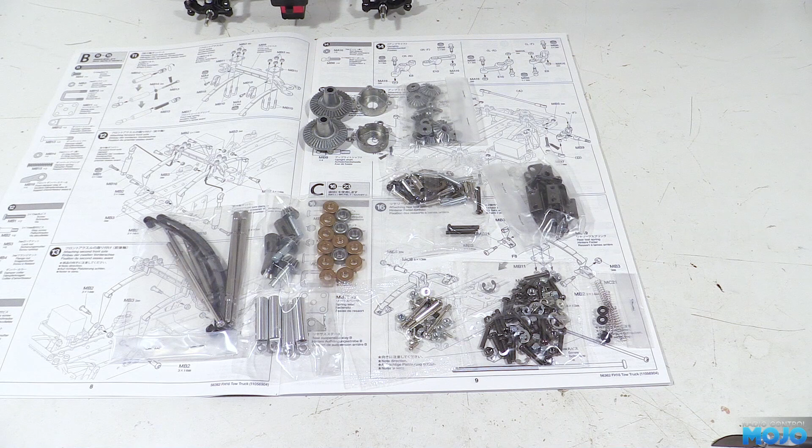Step 16, the rear leaf spring packs. We need 4 3x14 step screws, 2 round bushings, the silver ones that look like really tall top hats, 2 spring seats, 4 U-bolts, 4 stays, 5 M3 nylock nuts, 8 thin M3 nylock nuts, and the really long screw. For plastic we need 2 F2s and 2 F8s.

First then we need to make the 2 spring and mount assemblies. We use 2 of the U-bolts over F2, slotting them into the guides. Then pop the F2 over the centre rivet on the outside of the leaf pack. On the inside we use one of the F8s followed by a spring seat. To clamp it all up we use the 4 thin nylocks on the ends of the U-bolts.

Just like when we did the front suspension, we don't want to tighten them up all the way just yet. Do them up evenly, but so there's still a little bit of movement in the parts. On the ends of the springs we fit the stays with a step screw and a full height nylock, one on each end. When done it should look a little bit like this.

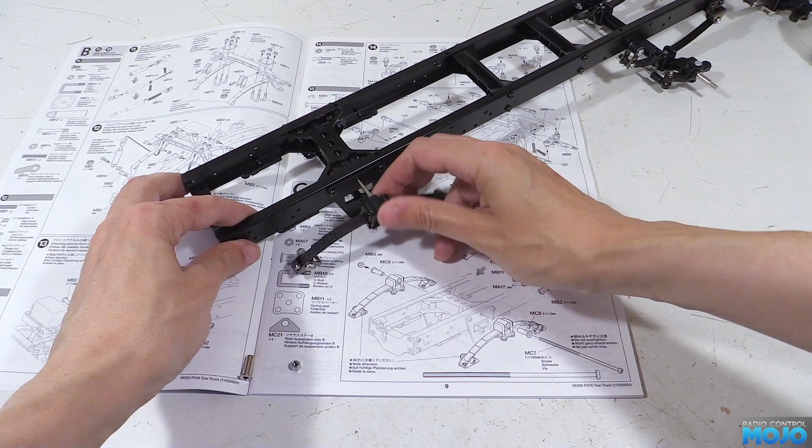Make a second one and we can fit them to the chassis. All we do is pop one of the bushings into the hole in F2 so the flange is on the outside, then pass the long screw through the bushing, through the rear of the chassis, through the cross member and out the other side. The other leaf spring assembly goes on the other side with its bushing, then we use the last nut to hold it all together.

When doing this one up, do keep in mind that it's a really long screw in there, so it might be a bit tricky to feel when it's fully done up. The screw will twist and even to an extent stretch. As long as it's tight enough to take out any free play, plus an extra 1/8 of a turn or so, it's going to be just fine. What you really don't want to do is just keep going and shear off the screw head. When done, the 2 spring assemblies should freely swing on their bushings with no catching or binding.

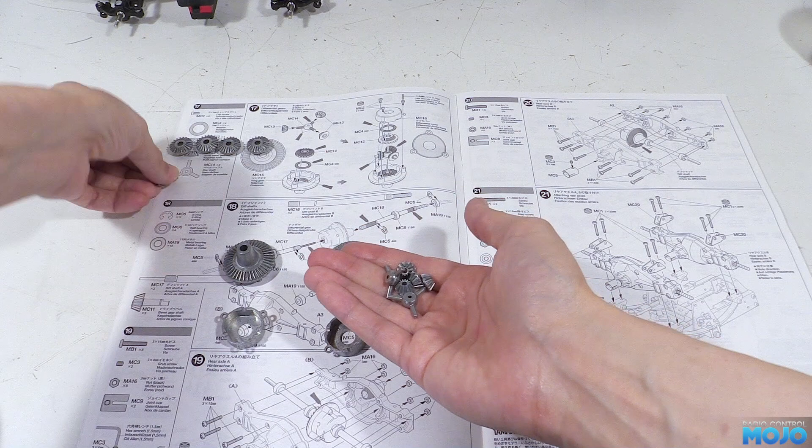Step 17, the differentials. For this one we need 2 of the diff case parts, 4 of the large internal gears, 6 of the small internal gears, 2 star shafts, 4 thin steel washers, and 6 M2x5 caphead screws.

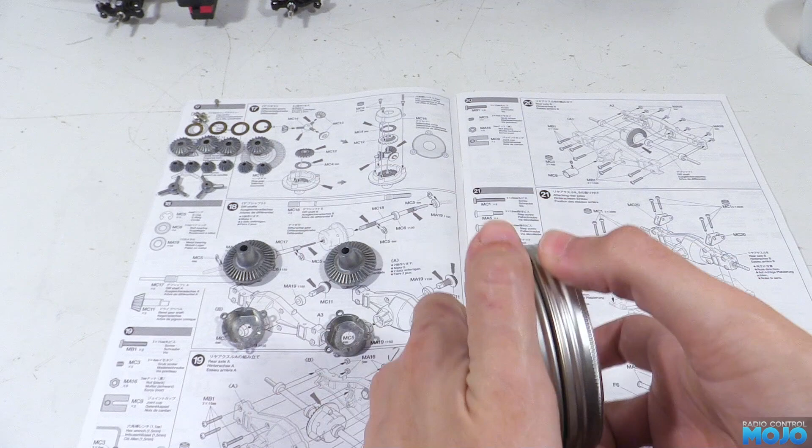Usually you'd build these up with the supplied ceramic grease, which is a very good lightweight lubricant. However, because it makes for some freely running diffs, you can find yourself in a situation where you're giving the truck some throttle, but it's not going anywhere. Usually one of the wheels is unloaded and just spinning freely. To help with this, I've been using some really thick and sticky blue lithium in my last few builds.

It still lets the diff do its thing, but it adds a little bit of stickiness, so you're a bit less likely to get stuck. Plus, if it mixes with Tamiya ceramic grease, it's not going to react, so we don't need to worry about leaks. The diffs are going to be well and truly buried in the axle when we're done.

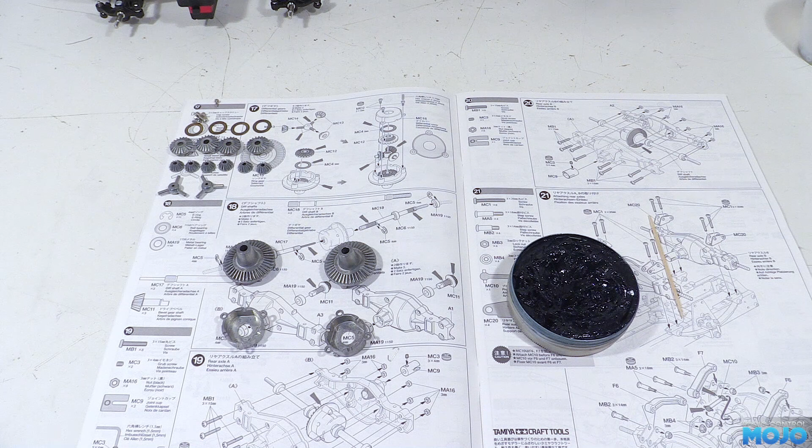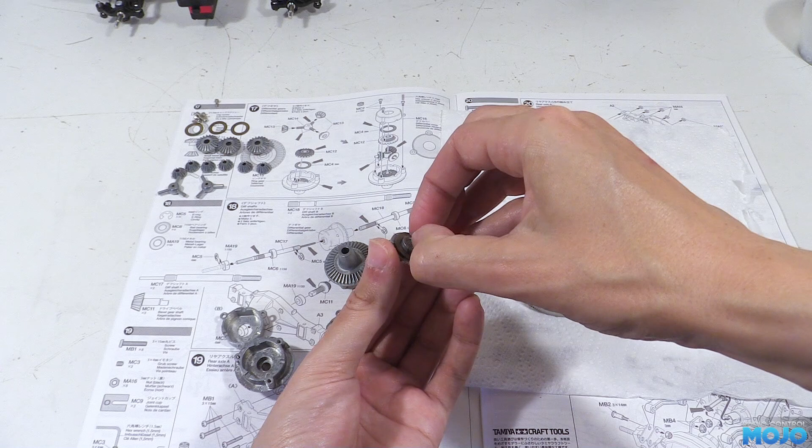If they ever need servicing, there's going to be quite a lot to take apart, so we need to get them right first time. We start off with one of the large bevel gears and add some grease to its back side. Pop one of the large washers on and apply some more grease to the washer. The gear then drops into the deeper half of the housing.

Next to the small gears, we grab a star shaft and apply a blob of grease onto one of the stubs. Then spin on one of the small bevel gears so it spreads out the grease as it goes. Repeat with the other 2 and it's ready to fit.

If you use blue lithium grease, try not to get it on your fingers as it does tend to stain things a little. All the parts that make up the diff are metal, and we really don't want anything falling apart once it's in the axle housing.

So we're going to add a little bit of thread lock to the threaded holes before we put it all together, just a spot on a cocktail stick and spread it around in the holes.

Right, now for the fun bit. We want to pretty much pack the diff with grease, the idea being the gears won't be able to fling it away once running. I'm using an ice lolly stick to blob it in around the large bevel gear first.

Then we drop the star shaft, lining up the stubs with the cutouts in the outside of the diff case, gently pressing them home so the gears are nicely meshed. Now we'll add some more grease, filling all the gaps between the gears.

And now on the top we need to add the second large bevel gear, grease up the top, add a large washer, grease that up too, and if there's any more space for grease we're going to add some more.

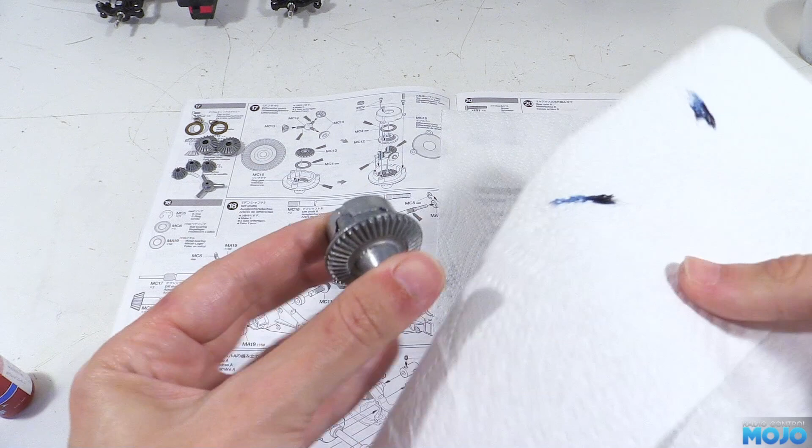Then we pop on the other half of the diff case and install the 3 screws. Install all 3 so they take up the slack, then nip them up a little bit at a time until they're bottomed out. You really need to bring the halves together straight so everything stays lined up.

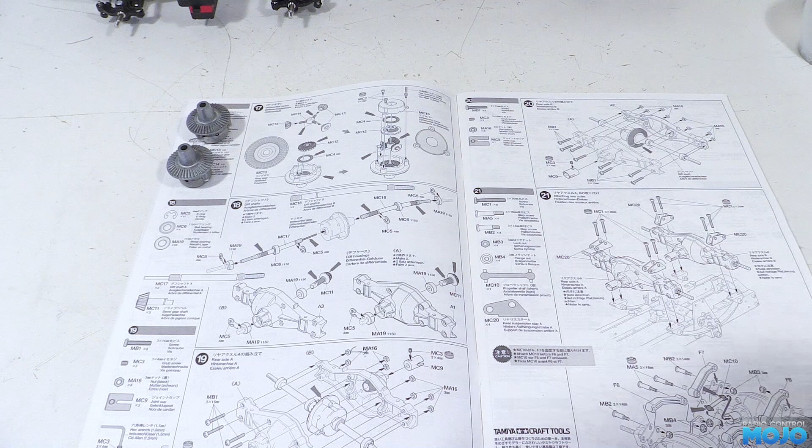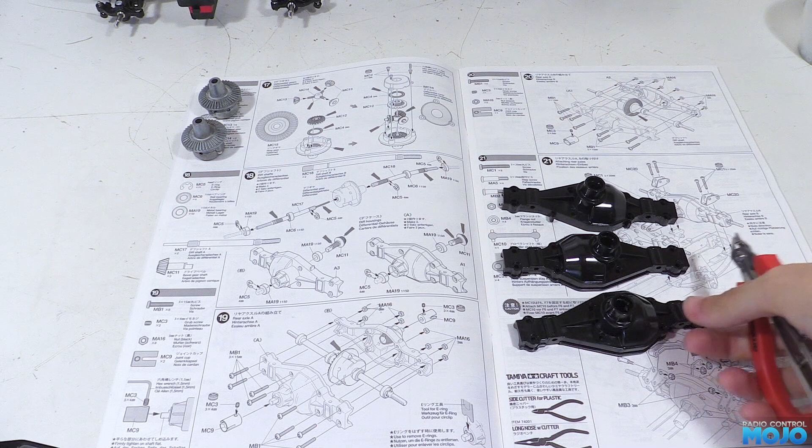Remember, once a truck's built, you're really not going to want to have to take it apart again. Chances are, now it's all been squeezed together, there's going to be a little bit of grease leakage, so wipe up before moving on. It's the kind of stuff that ends up getting absolutely everywhere, so you need to stay on top of the cleanup.

Both the diffs are exactly the same, so we'll build up the other one off camera, and that's step 17 complete. Step 18, axle shafts and the axle cases with the bevel gears.

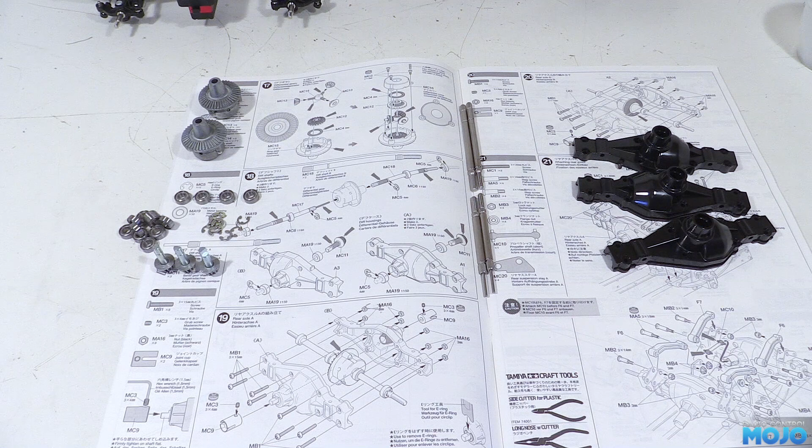For plastic parts we need 3 axle cases with the hole in the middle for a bevel gear, that's 2 A1s and an A3. Then for the metal bits we have the diffs, axle shafts, 3 bevel gears with a shaft, 4 1150 bearings from the kit.

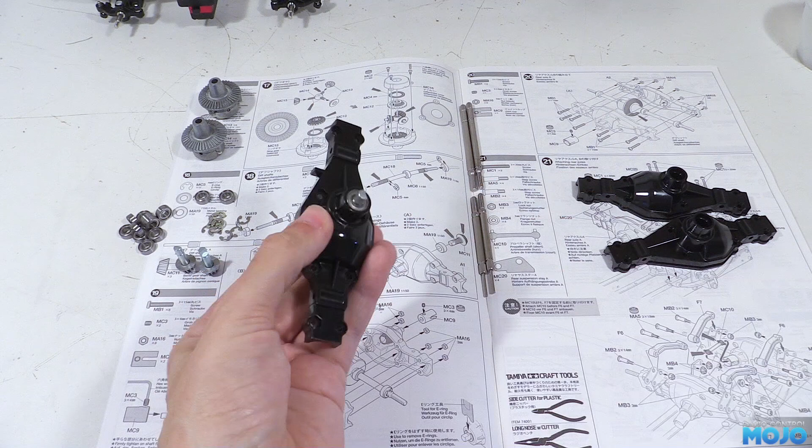Plus 10 more from the aftermarket bearing kit, so we replace the bushings. Lastly, there's 11 4mm E-clips.

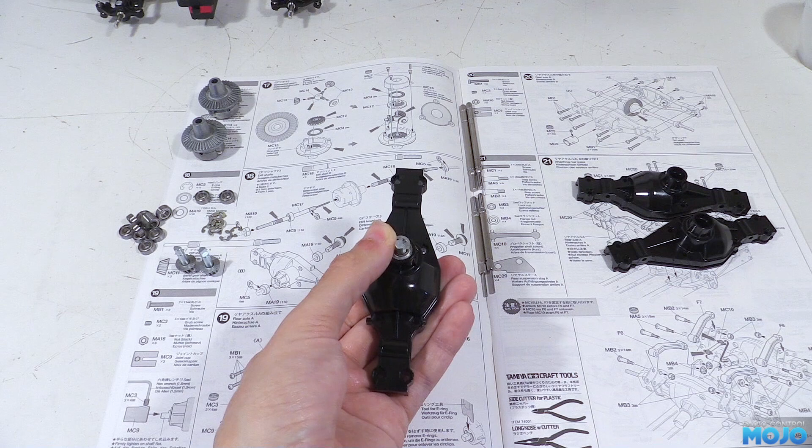First, just to get them out of the way, we're going to fit the bevel gears to the cases. If you're using the stock bushings, you'll need to break out the ceramic grease, but with the bearings you're better off leaving them dry. The grease is just going to attract dust and dirt and generally make an unnecessary mess.

To fit the gears, we pop one of the bearings over the gear shaft and press it into the inside of the case. You should be able to press it in all the way until the bearing bottoms out in the hole. Then from the outside we fit another bearing over the shaft so it sits flush with the plastic.

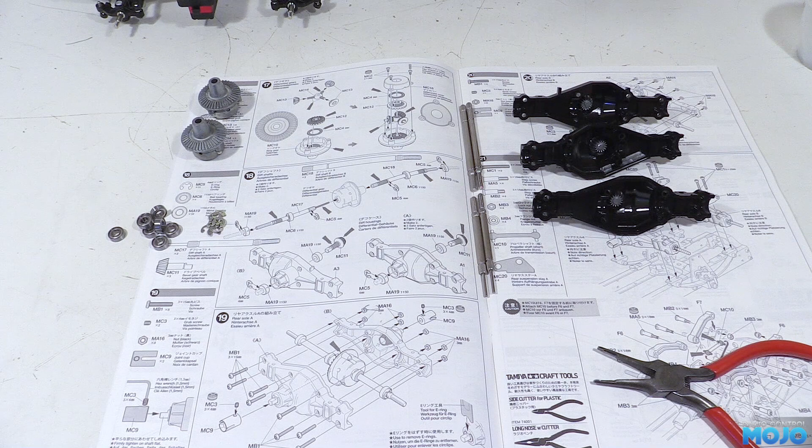It's important to fit the bearing with the shaft in place so they go in nice and straight. If they go in at a bit of an angle, you can get them stuck, making it a bit of a faff to sort out.

To stop the shaft from falling out, we need to use an E-clip in the slot near the end. Quite simple, we just need to do it twice more so the axle cases are all ready for the next steps.

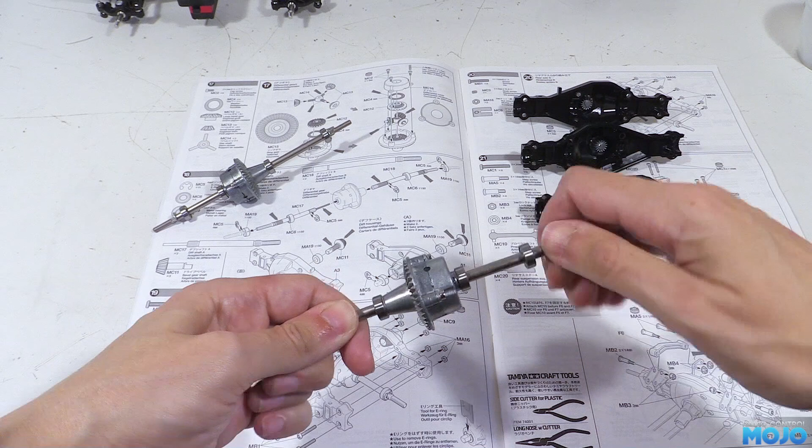The axle shafts are even easier to assemble, if a bit fiddly. All we do is clip an E-clip into one of the slots, doesn't matter which, slide on 2 bearings and clip another E-clip in at the other end. Repeat with the 3 shafts and they're ready to fit.

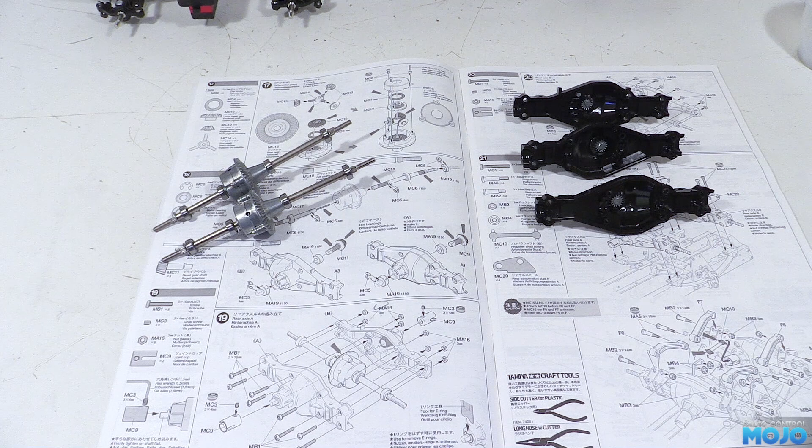On each diff we want 1 shaft with a hole and 1 with a pin to go into the diffs so the splines locate in the large internal bevel gears.

Sometimes they can be a bit reluctant to go in, so you need to use some gentle pressure and rotate and slightly wiggle them until they find their way in. Complete 2 and they're ready to fit.

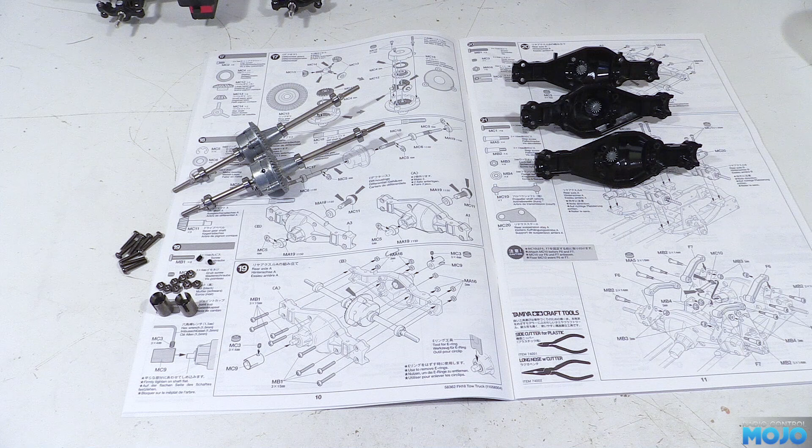Right now, if we try and turn the axle shafts in opposite directions, the diff is more or less completely solid. With lots of leverage, we could turn the internal gears, but it's going to free up on its own once we're running the truck. The grease is extremely thick, and it's going to take a minute or so for everything to settle.

Okay, step 19, the front rear axle. We're going to need 8 M3x15s, 8 M3 plain nuts, 2 drive cups and 2 M3x4 grub screws.

First job, so we don't lose the grub screw, is to fit the drive cups. Pop a grub onto the end of an Allen key and apply a bit of thread lock. Screw it into the drive cup a couple of turns and offer it up to the bevel gear shaft on the A3 axle case, the one with the hex-shaped holes, and tighten up the grub screw so it's biting on the flat of the shaft. Do the same with one of the A1 cases, one of the ones with the round holes.

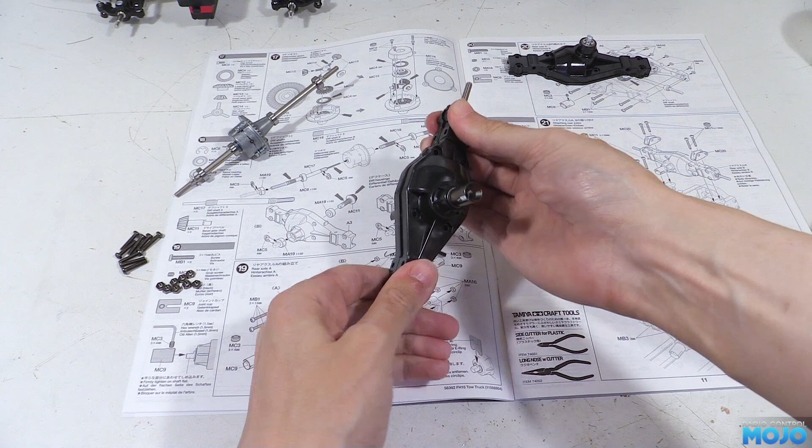Okay, now it doesn't matter which half we start with, so grab one of the axle cases and apply some ceramic grease to the bevel gear. Drop in the diff and shaft assembly so the bearings are in their slots, 2 right on the outside and 2 just either side of the diff. It's worth noting, due to the shape of the axle cases, you really can't get the diff in backwards, so if it fits, you're good to go.

To make sure the grease gets everywhere, we're going to add some more around the diff gear and rotate it to spread around the grease. Add a little more grease to the other bevel gear and we can bring the 2 halves together.

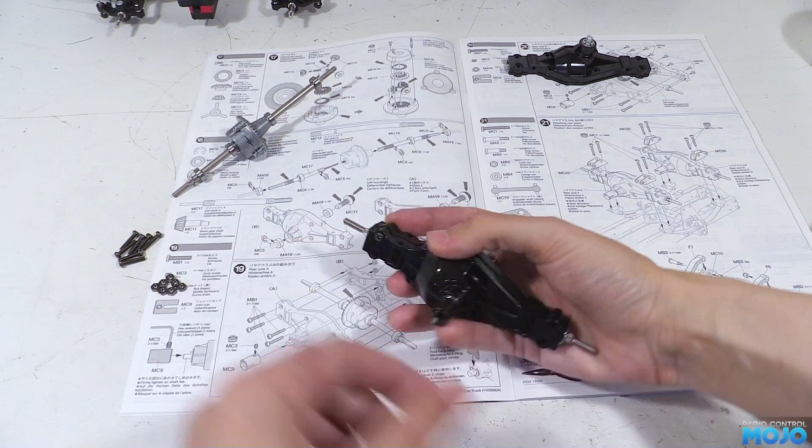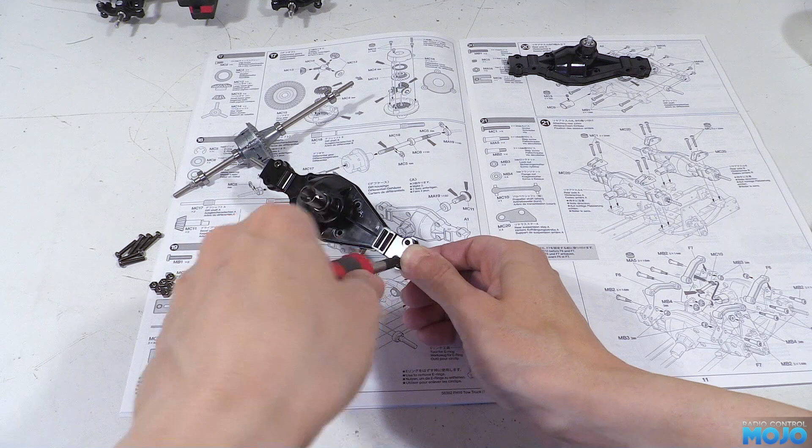It's worth noting, if you add too much grease, the worst that's going to happen is it's going to get flung off and make a bit of a mess inside the axle. Too little and you do run the risk of the gears wearing out prematurely. So to a large extent, more is almost always better.

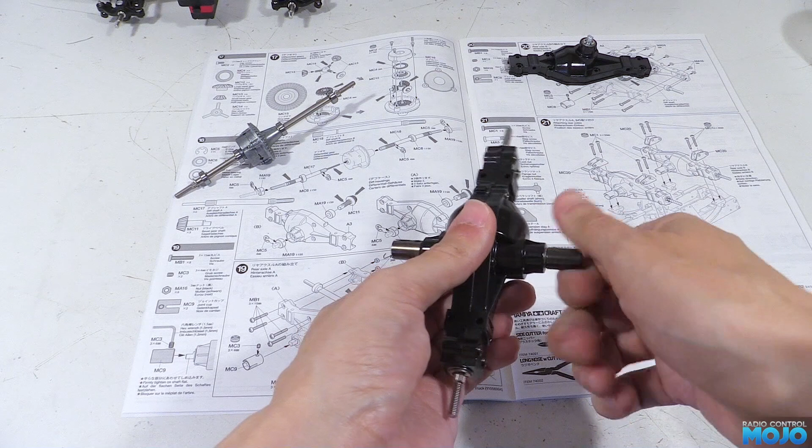Next we fit all the screws and nuts. Initially we just take up the slack on all of them, then we add a little bit of thread lock around the nuts before loosening the screws a couple of turns and re-tightening them up so they're done up properly. Again, we really don't want to have to take these apart again or try and replace a screw if it drops out, so we need to get it right first time.

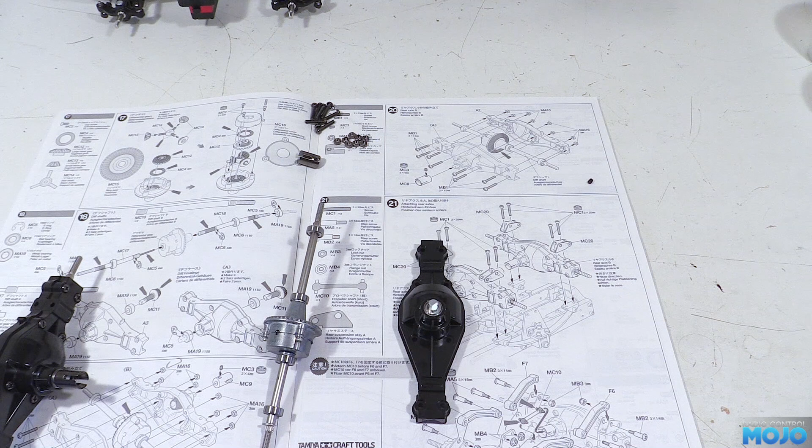When done, the axle should spin fairly freely. It might be a little bit notchy at this stage, but it'll smooth out within a couple of minutes of running when the truck's finished. As long as you build it carefully, it'll usually sort itself out pretty quickly.

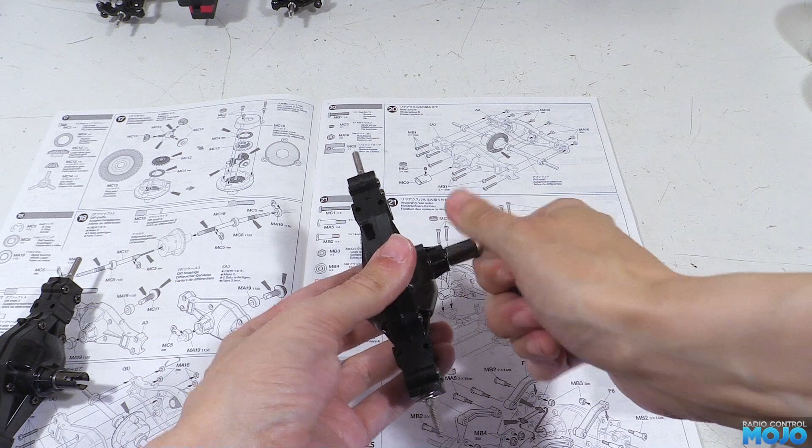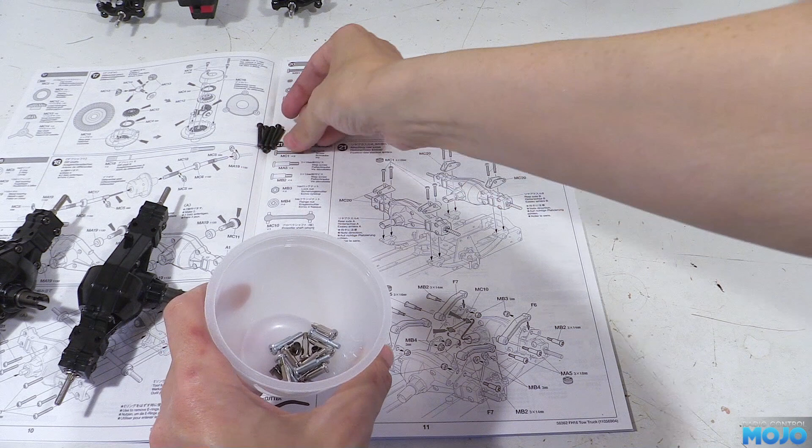Step 20, the rear axle, which is pretty much the same as the front axle, except there's only one bevel gear and the other half of the case is an A2. This time we need the same 8 M3x15s and 8 M3 plain nuts, a single drive cup and a single M3x4 grub screw. Assembly is exactly the same as the last step, so we're just going to skip to it being finished. Internally it's all greased up and all the screws have been thread locked.

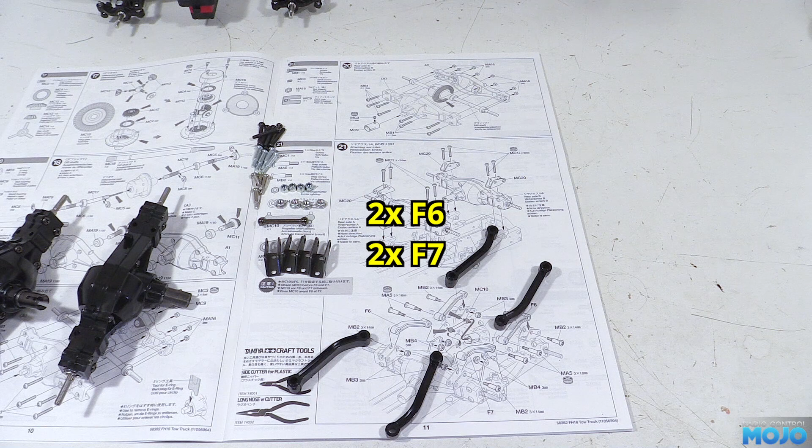Step 21, attaching the axle to the chassis. For screws and all the other bits we need 8 M3x20s, 4 3x18 step screws, 4 3x14 step screws, 4 M3 nylocks, 4 M3 flange nuts, the short dog bone shaft, and 4 suspension stays. For plastic we need 2 F6s and 2, I've got F6s again here, but it will be something different, to make up the lower suspension arms.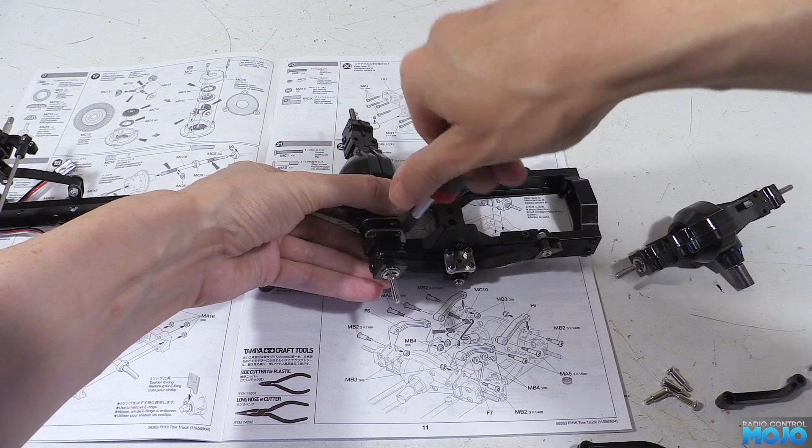Before we fit anything to the chassis, we need to be 100% sure that we've got the axles the right way up. The diagrams in the manual are pretty good, so make sure you're all matched up. If you get them the wrong way up, the wheels will spin the wrong way, which can be problematic when you try driving the truck. When you're sure you've got them the right way up, the actual fitting is quite straightforward. We grab one of the stays and drop in a pair of the M3x20s.

Then we offer them up to the underside of the axle and pass the screws through, lining them up with the brackets on the end of the leaf spring. Take up the slack in the screws, but don't fully tighten them just yet. Flip the axle over and apply some thread lock on the exposed threads, then loosen and retighten all 4.

This time nip them up so they're bottomed out plus a little bit extra. The rear axle fits in exactly the same way, just double check it's the right way up. Back in step 16, when we built the leaf packs, we left the nuts on the U-bolts just a little bit loose. Now we have the ends tied together by the axles, we can tighten them up the rest of the way, plus once the arm goes on, the nuts are going to be a little bit tricky to get to. The arms are next, which get attached to the chassis with the long step screws and a flange nut.

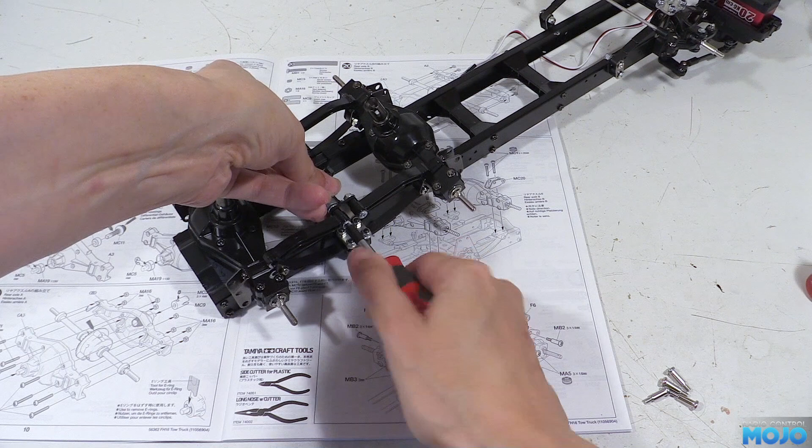The arms go on so that the end with the built-in spacer sits up against the chassis. We just offer it up with the step screw and apply a little bit of thread lock before threading on the nut and tightening it up. You should end up with an arm that swings perfectly freely, and to be honest, the tolerances are so big something would have to be very wrong for these to have any sort of bind. But you never know, stranger things have happened.

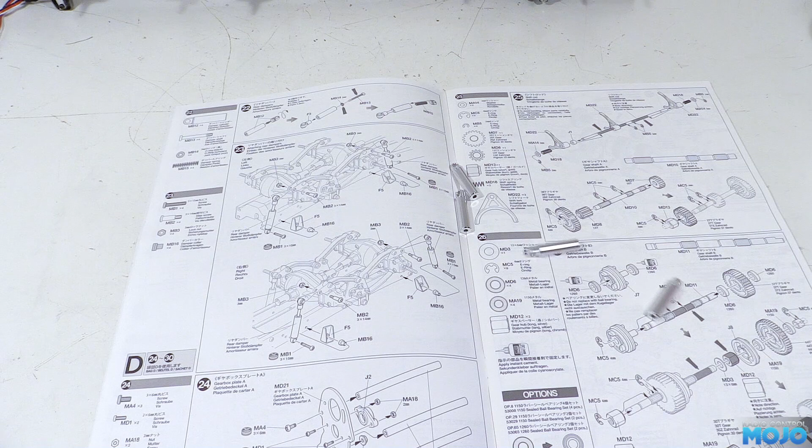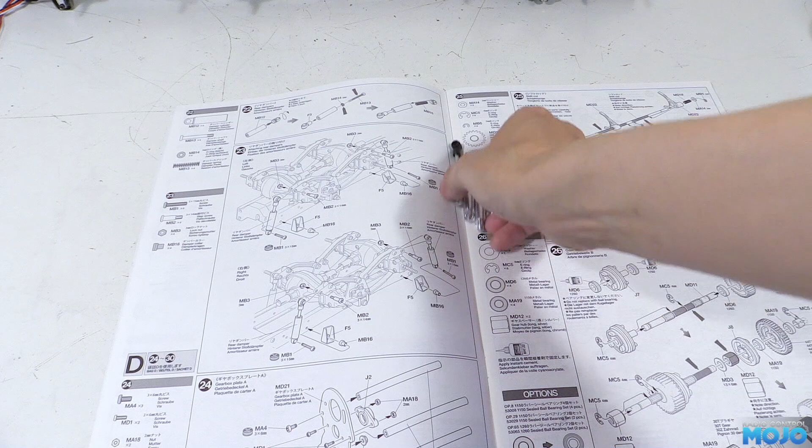Install all 4 and we can start attaching them to the axle. But first, don't forget to pop in the drive shaft. Once the arms are fitted, we won't be able to rotate the axles to get it in. Now we use the shorter step screws from the outside with one of the nylock nuts to hold it in. Do all 4 and that's the axles hung. The axles should freely move up and down, and if you spin the input drive cup, they should both spin the right way.

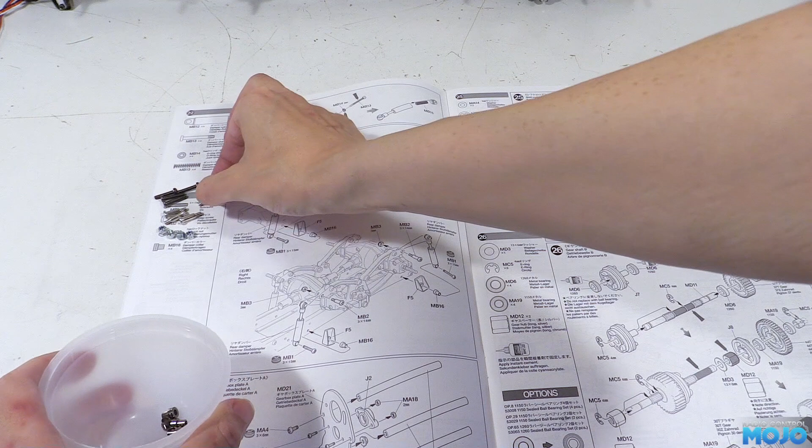If so, that's step 21 complete. Step 22, the rear dampers. Now these are exactly the same as the bits we put together for the front dampers, so we're going to skip ahead to them being put together. As long as you build them with a bit of grease and you don't over tighten the plastic rod ends, you're going to be good to go.

Step 23, fitting the dampers. Right, we're going to need 4 M3x15s, 4 M3 nylocks, 4 3x14 step screws and 4 damper collars. For plastic we have 4 F5s, the spacer cover widgets that cover the top of the dampers. All 4 fit in the same way, so we'll concentrate on one and then we'll cut to the rest being done.

Right, we need to pop one of the collars into the top of the damper. From the other side we insert one of the screws, pass the thread through one of the plastic bits, then offer it up to the chassis where we have a threaded hole for the screw. Take up the slack, but don't fully tighten just yet.

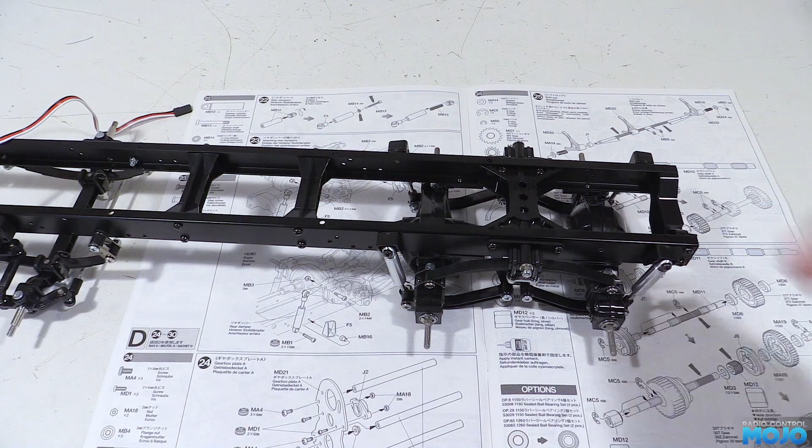At the bottom we line up the rod end with the suspension stay and insert a shoulder screw, then to keep it from falling out we add one of the nylocks and tighten it up. As the finishing touch, we need to thread lock the top screw, which we do by using a cocktail stick to add some to the exposed thread in the chassis, then loosening and fully retightening the screw. It's the same again 3 more times, so do that and that's the rear axles hung and ready to go.

I think that makes the chassis actually start to look like something now, which is a bit of a minor milestone. It's a truck chassis now, rather than just a few bits bolted together.

Very cool. Next time we'll be on bag D, or dare I say the D bag, which is the 3-speed gearbox. Something we've covered a few times on the channel already, but it's important to get it right, so we'll go through it in some detail and talk about some of the contentious steps in the build.